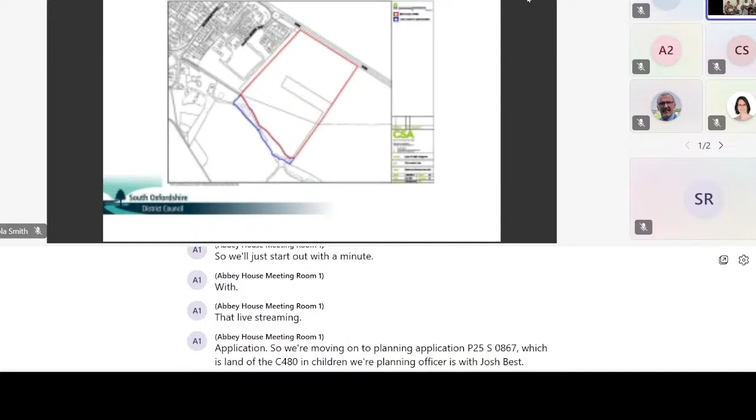So we're moving on to planning application P25S0867, which is land off the B480 in Chalgrove. The planning officer is Nicola Smith. Thank you, Chair. This is an outline application for up to 160 dwellings, far eastern end of Chalgrove. This site has been subject to 2 previous applications in recent years, and I'll discuss the detail of the planning history shortly. The application is substantially the same as the previous submission.

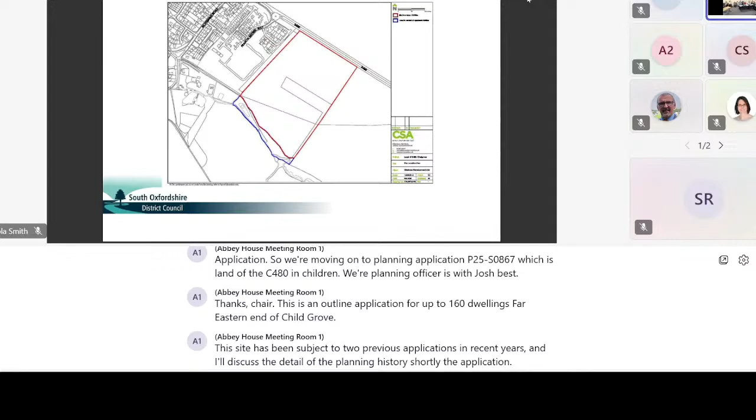However, the site. I'm so sorry to interrupt, but we can hear a loud volume next door. I'm just wondering whether we could just have that turned down. Thank you, Matthew.

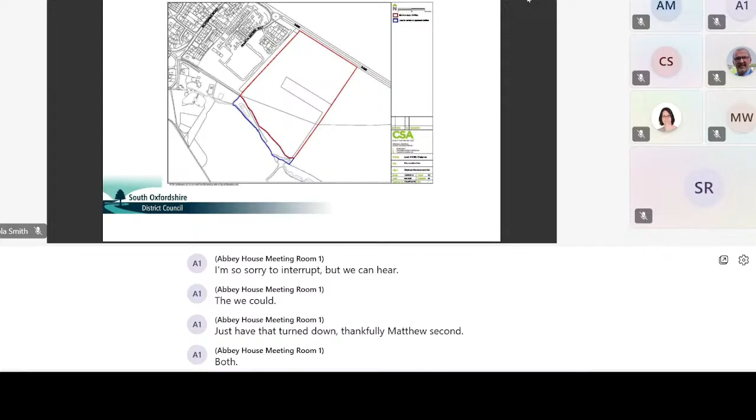The application is substantially the same as the previous submission. However, the site in this case has been reduced slightly to take the developable area outside of the revised flood zones to Chalgrove Brook at the south, which is indicated by the blue section on the plan.

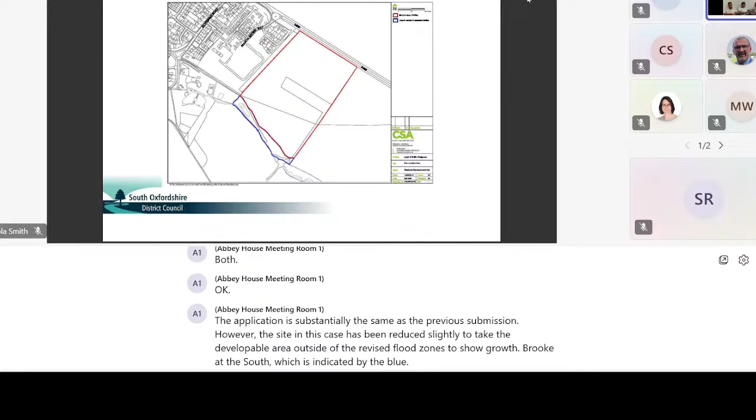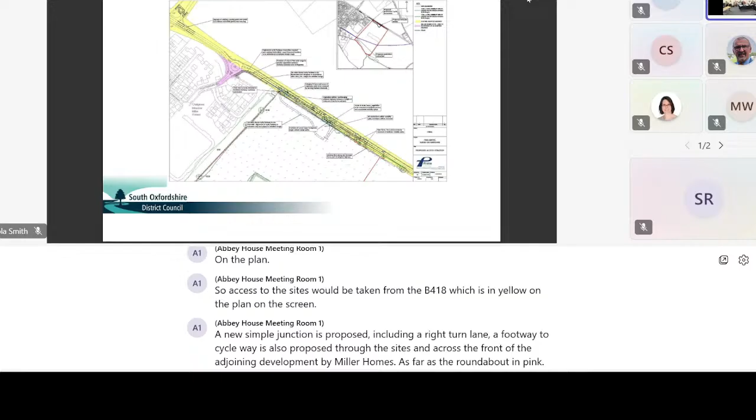So access to the site would be taken from the B480, which is in yellow on the plan on screen. A new simple junction is proposed, including a right turn lane. A footway cycleway is also proposed through the site and across the front of the adjoining development by Miller Homes, as far as the roundabout in pink, to enable access to the footpath cycleway network towards the village.

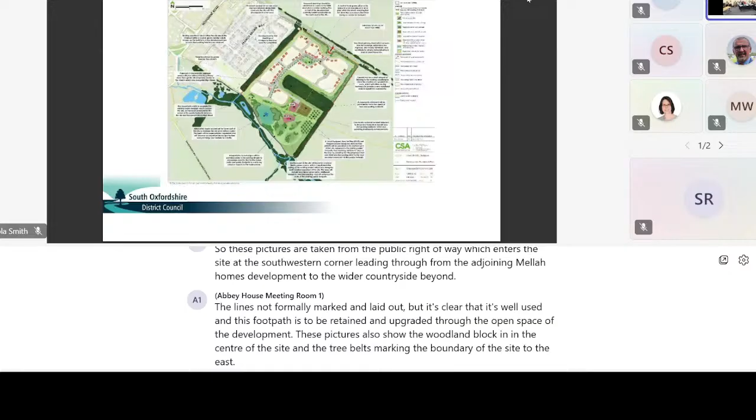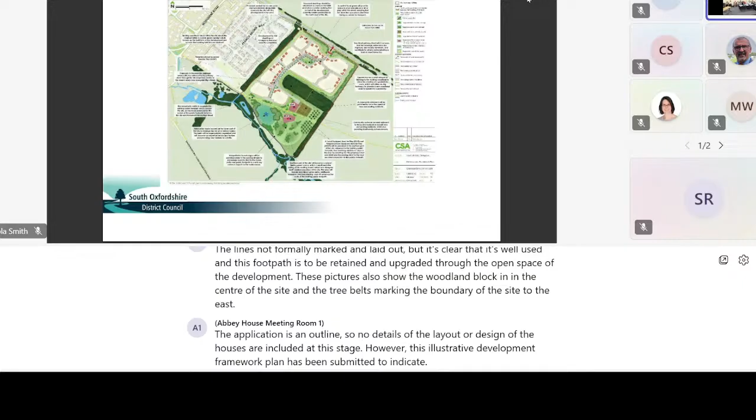The application is in outline, so no details of the layout or design of the houses are included at this stage. However, this illustrative development framework plan has been submitted to indicate how the development could be accommodated on the site, whilst retaining important features such as the woodland block that you can see in dark green in the centre, and the public right-of-way, which is denoted by the yellow dashed line through the site, kind of from the corner of the other development sites to the west, leading out to the open countryside.

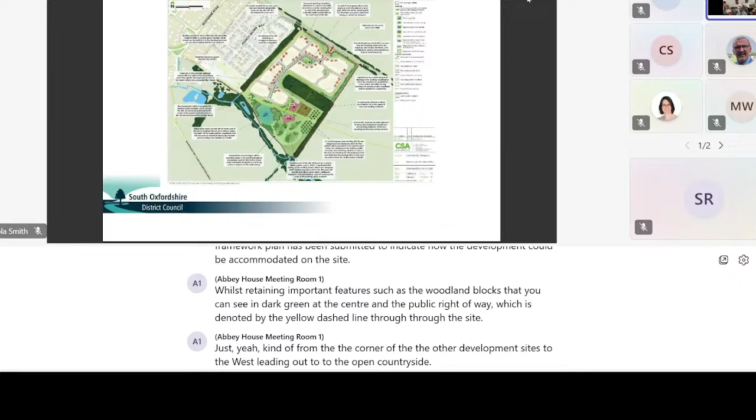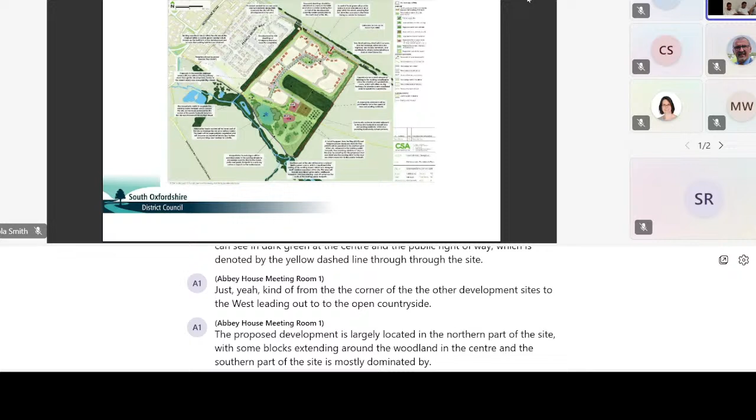The proposed development is largely located in the northern part of the site, with some blocks extending around the woodland in the centre. And the southern part of the site is mostly dominated by open space, with 2 play areas, allotments, an orchard, a large drainage basin, together with natural green space. These proposals have changed very little from the previous applications.

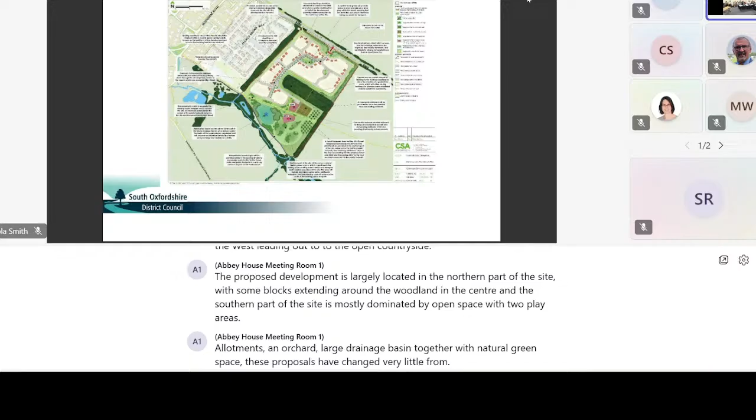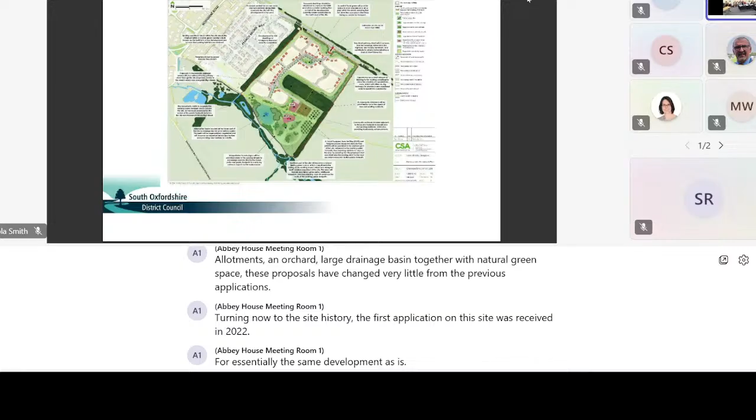Turning now to the site history. The first application on this site was received in 2022 for essentially the same development as is currently proposed. The application was refused under powers delegated to officers for 5 reasons, and these are summarised as: number 1, the development is contrary to the development plan; 2, there would be unacceptable landscape harm; 3, no archaeology information was submitted; and 4 and 5 related to the absence of a legal agreement to secure the infrastructure and affordable housing required. This refusal was appealed, and the appeal was dismissed in early 2023.

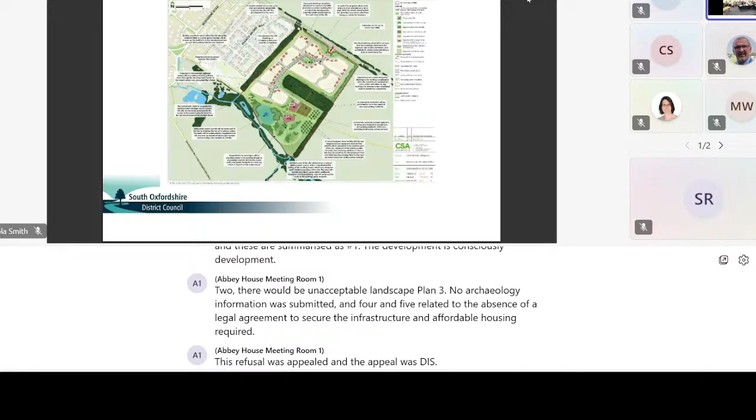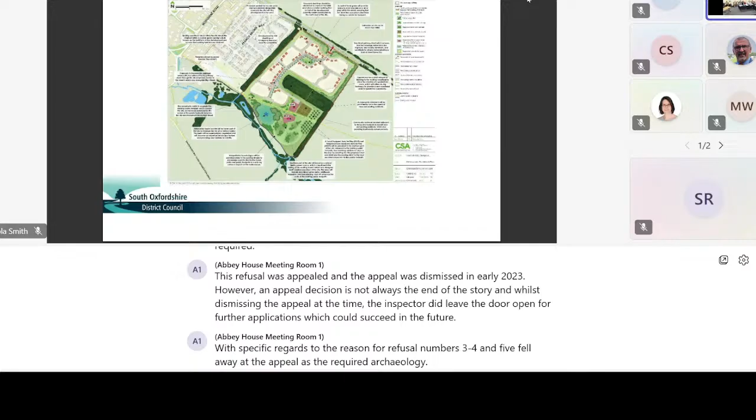However, an appeal decision is not always the end of the story, and whilst dismissing the appeal at the time, the inspector did leave the door open for further applications which could succeed in the future. With specific regard to the reasons for refusal, numbers 3, 4 and 5 fell away at the appeal as the required archaeology information was submitted and a legal agreement was agreed with the council to secure the infrastructure. Reason 3 would not apply to this application, as the archaeology information is up to date and to the satisfaction of the county archaeologist, and conditions are recommended to ensure proper archaeological investigation is carried out.

Reasons 4 and 5 were overcome at the appeal by the signing of a legal agreement, which the applicants have advised they would be willing to do again. If the application is approved, work will begin on drawing up that agreement. If, however, the application were to be refused, the same reasons would also apply.

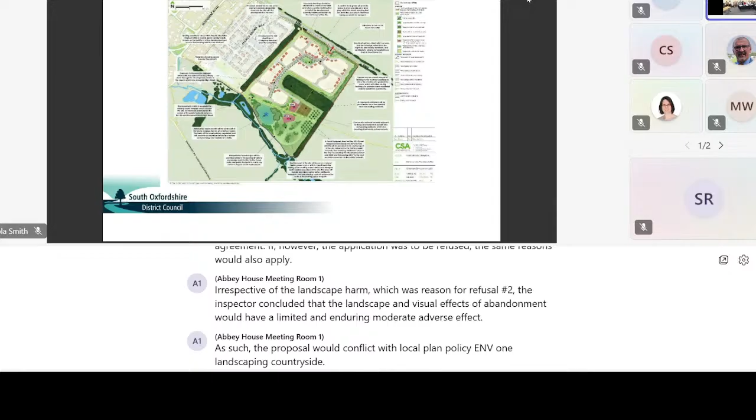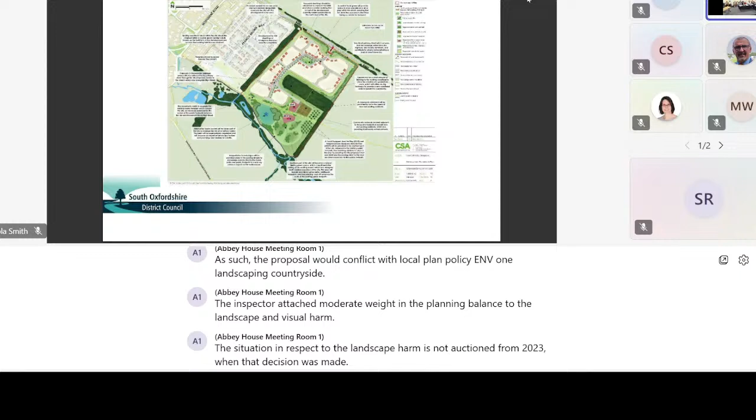In respect of the landscape harm, which was reason for refusal number 2, the inspector concluded that the landscape and visual effects of the development would have a limited and enduring moderate adverse effect. As such, the proposal would conflict with local plan policy ENV1, landscape and countryside. The inspector attached moderate weight in the planning balance to the landscape and visual harm. The situation in respect to the landscape harm has not altered from 2023, when that decision was made. Some harm to the landscape will arise from the development, and I have given this moderate weight in the planning balance as per the appeal decision.

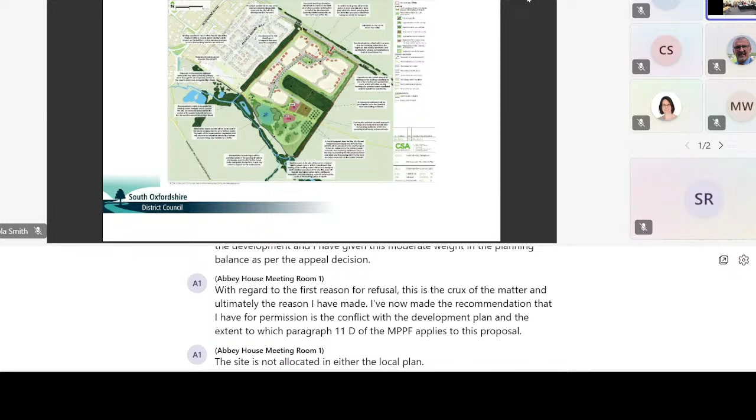With regard to the first reason for refusal, this is the crux of the matter, and ultimately the reason I've now made the recommendation that I have for permission: the conflict with the development plan and the extent to which paragraph 11D of the NPPF applies to this proposal. The site is not allocated in either the local plan or the neighbourhood plan and lies outside the built-up area of Chalgrove. The development remains in conflict with the spatial strategy for the district.

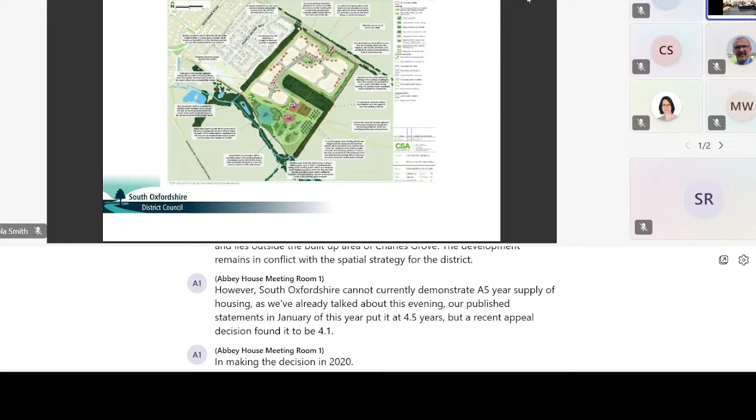However, South Oxfordshire cannot currently demonstrate a 5-year supply of housing, as we've already talked about this evening. Our published statement in January of this year put it at 4.5 years, but a recent appeal decision found it to be 4.1. In making the decision in 2022, the inspector for this site noted that the council were unable to demonstrate a 5-year supply of housing at that time either.

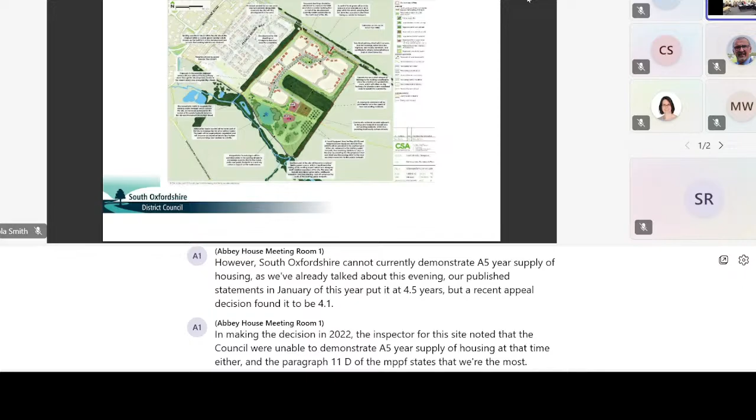And paragraph 11D of the NPPF states that where the most important policies for determining a proposal are out of date, i.e. there's no 5-year land supply, permission should be granted unless any adverse impacts of doing so would significantly and demonstrably outweigh the benefits when assessed against policies of the framework read as a whole. And this is commonly known as the tilted balance.

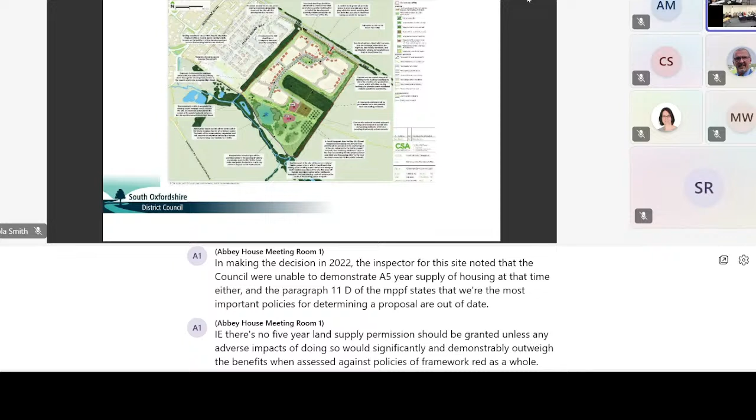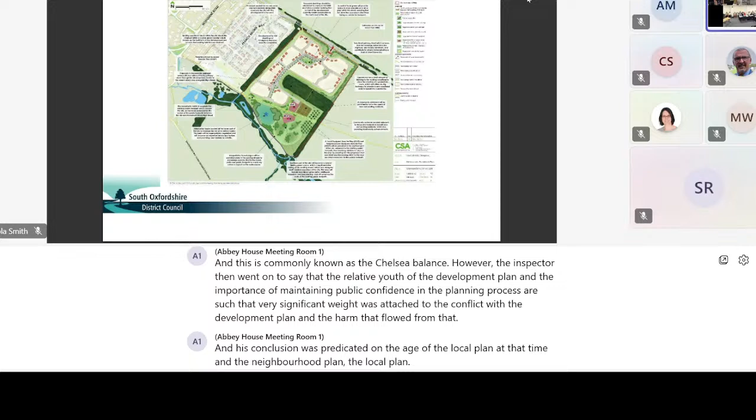However, the inspector then went on to say that the relative youth of the development plan and the importance of maintaining public confidence in the planning process are such that very significant weight was attached to the conflict with the development plan and the harm that flowed from that. And his conclusion was predicated on the age of the local plan at that time and the neighbourhood plan. The local plan, as you know, was adopted in 2020 and was less than 3 years old at the time of the decision. It is now 4.5 years old and due to be replaced by the joint local plan within the year, is the programme. The Chalgrove neighbourhood plan was made in 2018 and is now 7 years old.

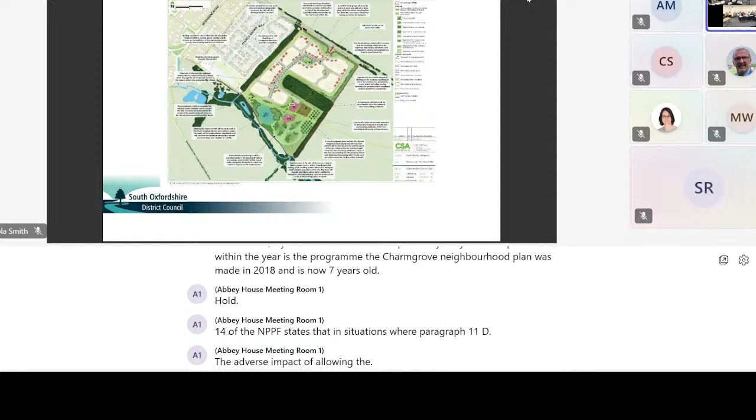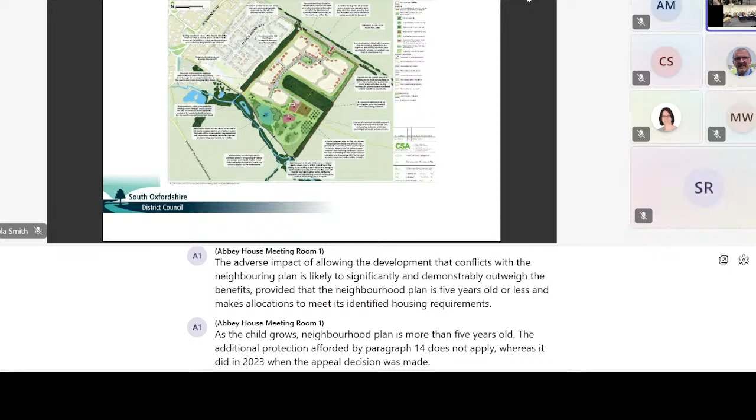Paragraph 14 of the NPPF states that in situations where paragraph 11D applies, the adverse impact of allowing the development that conflicts with the neighbourhood plan is likely to significantly and demonstrably outweigh the benefits, provided that the neighbourhood plan is 5 years old or less and makes allocations to meet its identified housing requirements. As the Chalgrove neighbourhood plan is more than 5 years old, the additional protection afforded by paragraph 14 does not apply, whereas it did in 2023 when the appeal decision was made. Officers consider that we are no longer in a situation where the relative youth of the plan can be claimed and the tilted balance must be applied to this scheme.

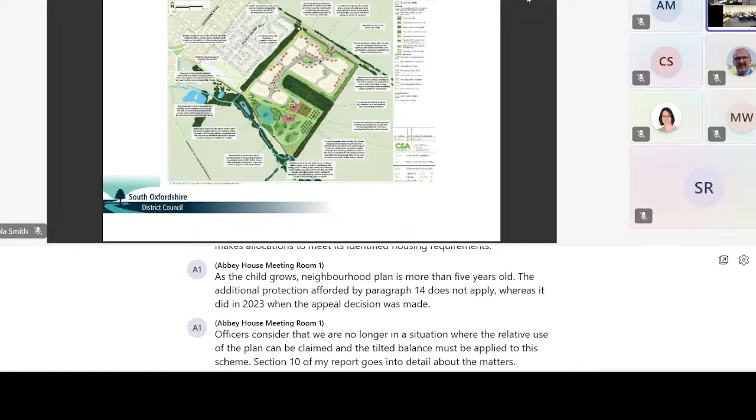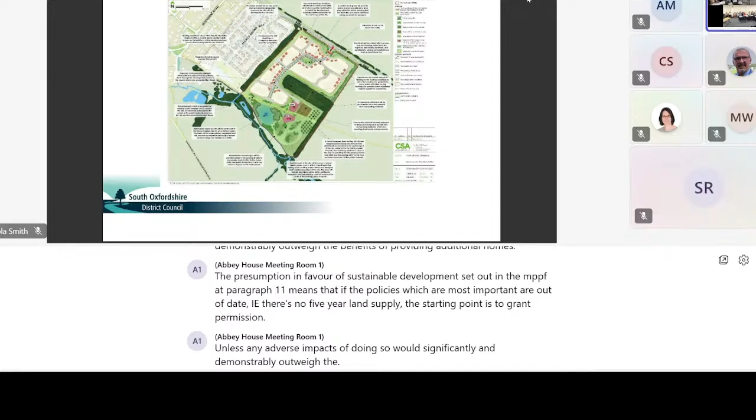Section 10 of my report goes into detail about the matters that weigh for and against the proposal, concluding that whilst there are impacts of the proposal which weigh against it, notably landscape impact, conflict with the development plan, lack of school places and connectivity, taken together, they do not significantly and demonstrably outweigh the benefits of providing additional homes. The presumption in favour of sustainable development set out in the NPPF at paragraph 11 means that if the policies which are most important are out of date, i.e. there's no 5-year land supply, the starting point is to grant permission unless any adverse impacts of doing so would significantly and demonstrably outweigh the benefits. The application is therefore recommended for permission, subject to the conditions set out in my report and a legal agreement.

Okay, thank you, Nicola. Right, we have a number of speakers on this. First speaker is Councillor Jan Russell from Chalgrove Parish Council.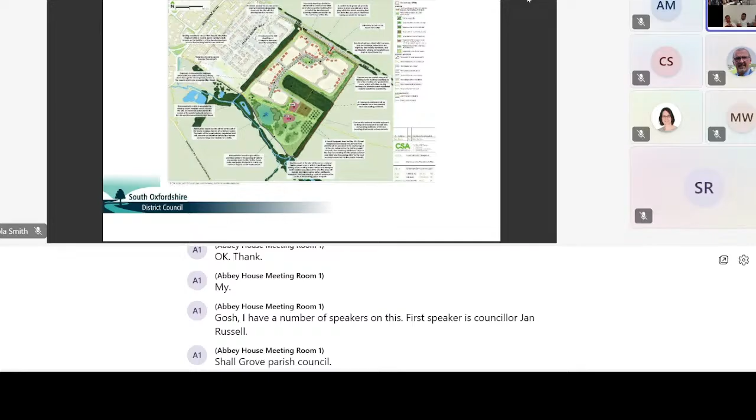You'll have 5 minutes starting from when you... Yeah, I was actually told I had 3 minutes, so... I don't know. That's the second one that said that. We've never had 3 minutes. That's what we were told. Why, who? It came through our clerk, so I'm not sure. From your clerk at Chalgrove? Yeah. No, she's wrong. Wasn't she asked by somebody? Someone called Anne told her, SODC clerk. Anyway, that's fine. Well, we'll take that up because it's never been the case in this council.

Angela Rayner said build, build, build, but she also added on to her statement the right houses in the right places. Chalgrove Parish Council is totally opposed to this application, as we have been all the way through. Chalgrove Primary School has a capacity in its academy funding agreement of 210 places. As of yesterday, they have 224 pupils, including nursery, on their roll.

Figures in the officers' report are out of date. The Meadowbrook development, still under construction, means many children will need school places for years to come. There's been talk of Chalgrove expanding. Firstly, it's not possible, they don't have land. Secondly, they are a trust, so OCC have no control over them.

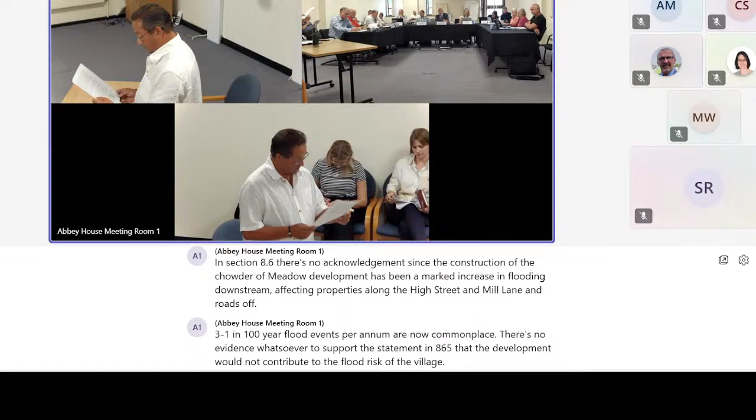In section 8.6, there's no acknowledgement that since the construction of the Chalgrove Meadow development, there's been a marked increase in flooding downstream, affecting properties along the High Street and Mill Lane and roads off. Three 1-in-100-year flood events per annum are now commonplace. There's no evidence whatsoever to support the statement in 8.65 that the development would not contribute to the flood risk of the village. There's ample evidence that upstream development has increased the number of times that Chalgrove floods. The NPPF clearly states that development should not increase the flood risk elsewhere.

It's also important to note that the river in question is a chalk stream, and only yesterday the government committed to increase protection of chalk streams, stating that from June 2025, the Environment Agency's updated Water Resource National Framework will place chalk stream environmental needs at the heart of all water resource planning and decision making. The primary reason this is being recommended for approval is the lack of a 5-year housing land supply. All other factors strongly argue against this application.

Chalgrove has done everything asked of it, and now we're being told we have to condemn future residents to an isolated area, unconnected to the village, with very limited employment options, very limited retail options, nowhere for their children to be educated, and with an inadequate public transport service that will leave them no option but to travel by car on narrow and potholed country lanes. The JLP 2041 has deallocated Chalgrove Airfield as a strategic location, so the panacea proposed by the applicant to resolve these issues will not materialise.

This application is almost identical to the one that was refused in 2022, rejected at appeal in 2023, and declined to be determined in 2023. Chalgrove stood shoulder to shoulder with SODC at the appeal hearing, and we won. We're prepared to do the same again.

If you will work with us and not against us, we'll provide the expert local knowledge and highlight the misinformation and outright lies the applicant will tell, but we can only do that if SODC supports our contention that this is not a sustainable development and should be rejected.

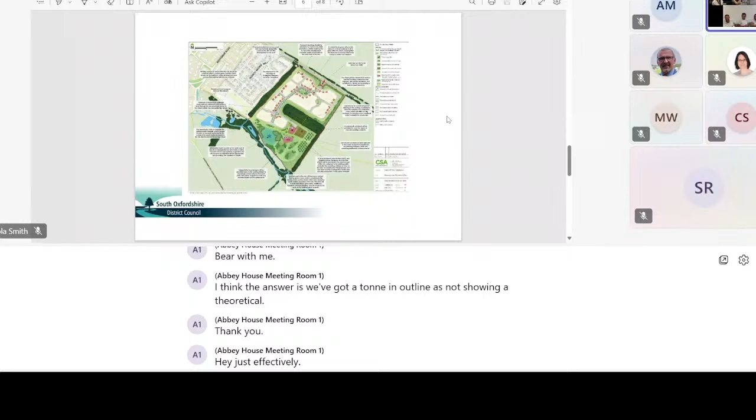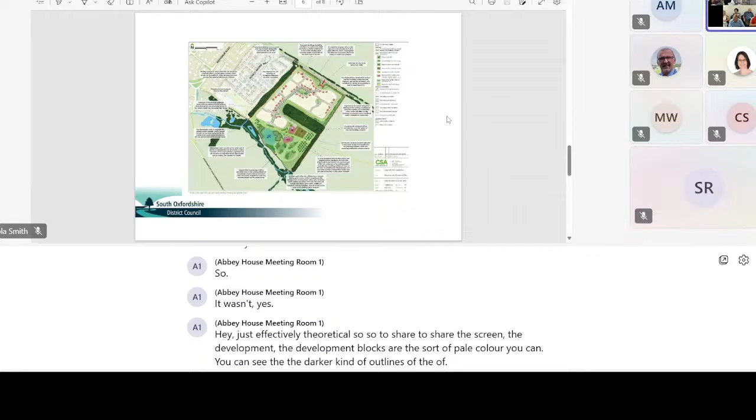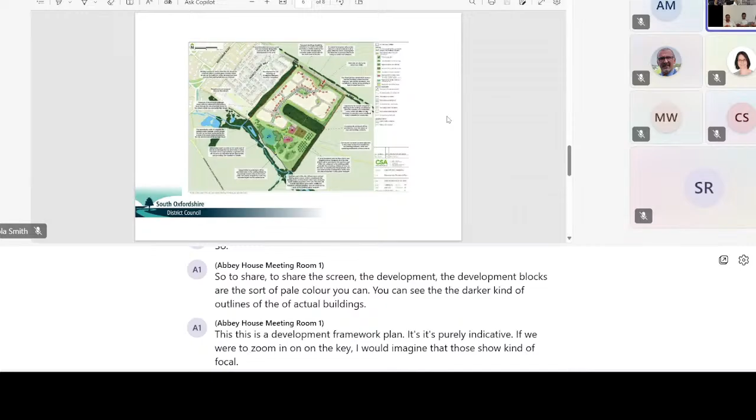So to share the screen, the development blocks are the sort of pale colour. You can see the darker outlines of actual buildings shown. This is a development framework plan. It's purely indicative. If we were to zoom in on the key, I would imagine that those show focal buildings and key frontages that are being identified on the plan. Thanks Councillor Arlett. Yeah, it's the paler blocks of development that are proposed to be housing. But it is very deceptive, isn't it?

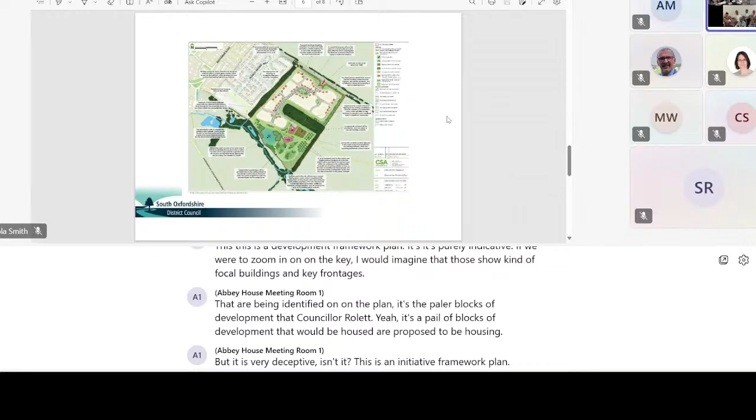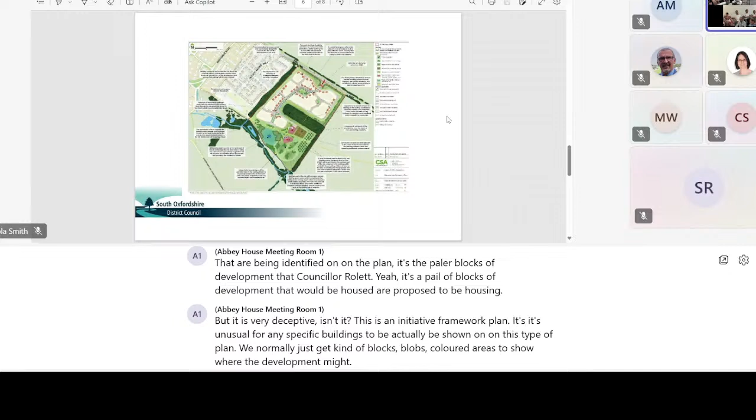This is an illustrative framework plan. It's unusual for any specific buildings to actually be shown on this type of plan. We normally just get blocks, blobs, coloured areas to show where the development might take place. Thank you. And this all comes down to the tilted balance, which Councillor Heathrow has already asked about. Is it true to say that the tilted balance is a subjective process? Or has a subjective element? Yes, it has a subjective element.

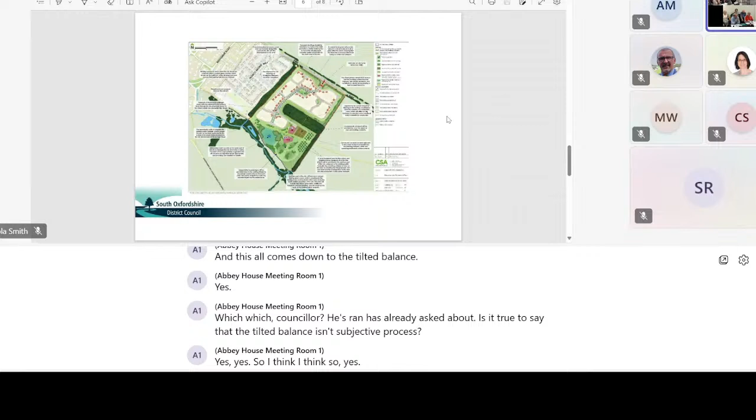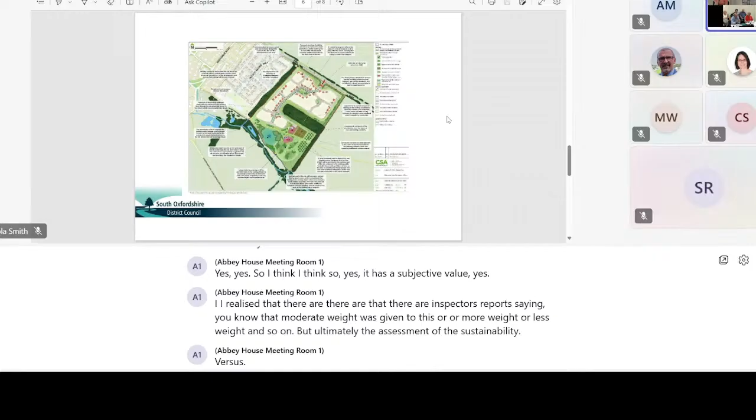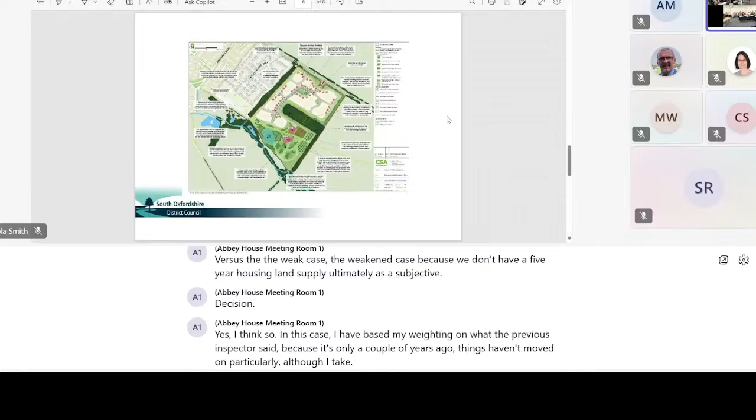I realise that there are inspectors' reports saying that moderate weight was given to this, or more weight, or less weight, and so on. But ultimately, the assessment of the sustainability versus the weakened case, because we don't have a 5-year housing land supply, ultimately is a subjective decision. Yes, I think so. In this case, I have based my weighting on what the previous inspector said, because it's only a couple of years ago. Things haven't moved on particularly, although I take the point about school places has moved on. That's an evolving situation. So I am basing it on what the inspector found on the previous appeal. Thank you.

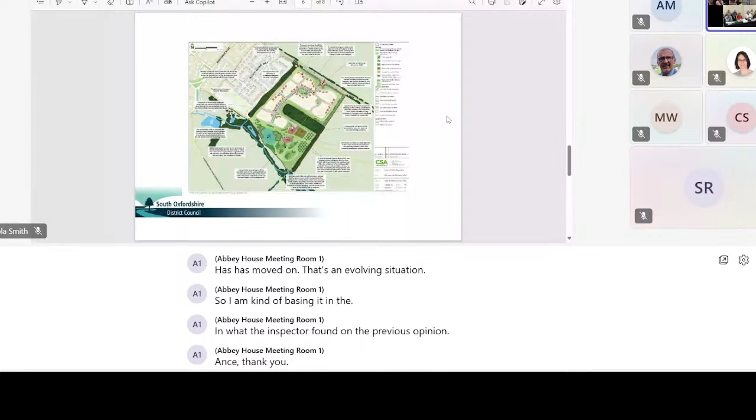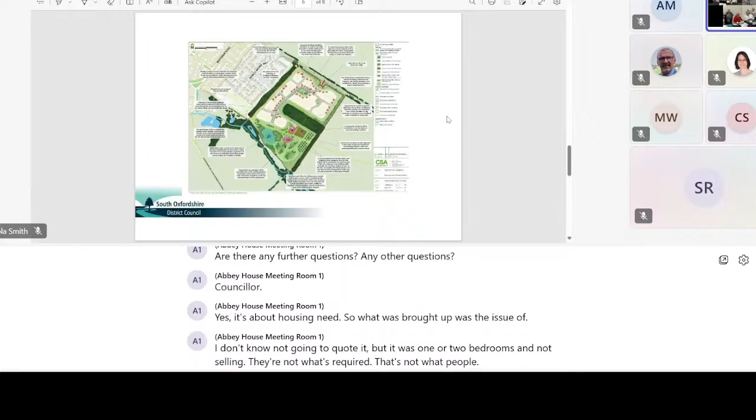Are there any further questions? Do you have another question, Councillor? Yes, it's about housing need. What was brought up was the issue that 1 and 2 bedrooms are not selling. They're not what's required. That's not what people are after. And quite often, if people are being moved into social housing that don't come from the area, it's not local need at all. So how do you respond to that? Okay, so

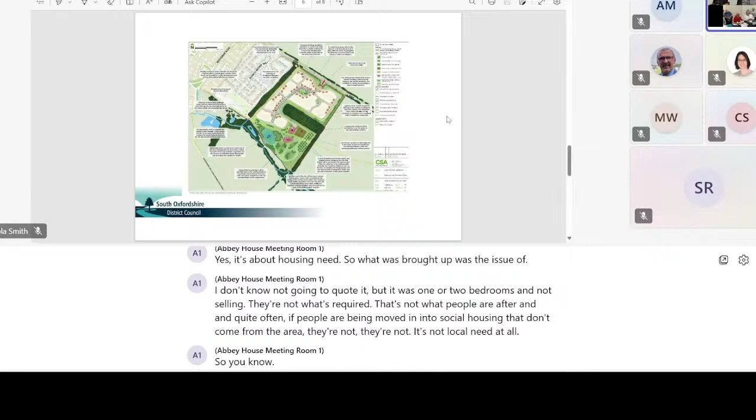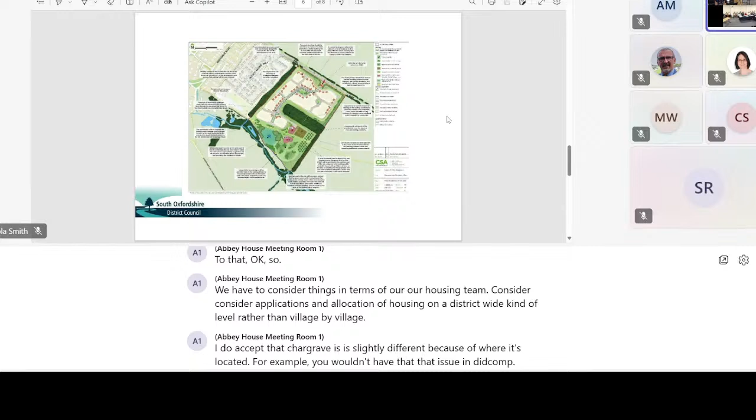our housing team consider applications and allocation of housing on a district-wide level rather than village by village. I do accept that Chalgrove is slightly different because of where it's located. For example, you wouldn't have that issue in Didcot, say. I'm aware that Meadowbrook, the housing site that was quoted, have had problems selling. They have come to us to ask that more affordable housing is put on the site rather than market housing. Some of that we've agreed to. So there is more social housing now on that site than was originally granted.

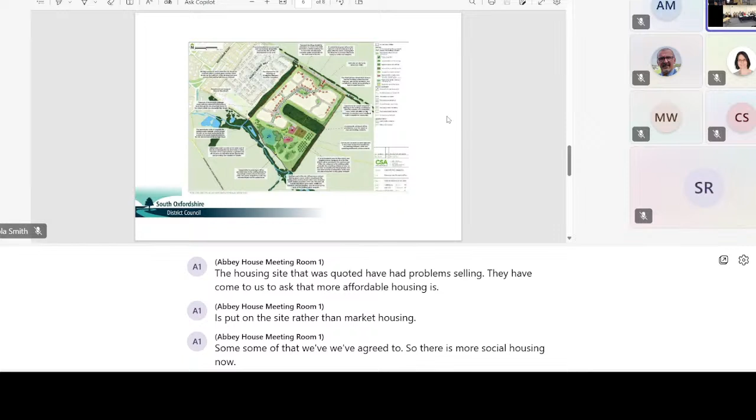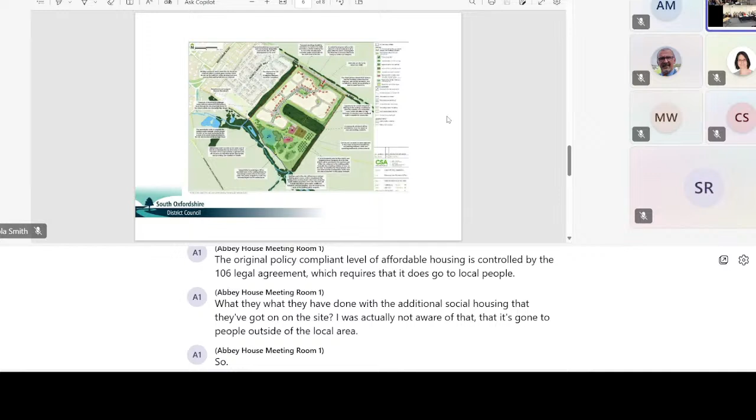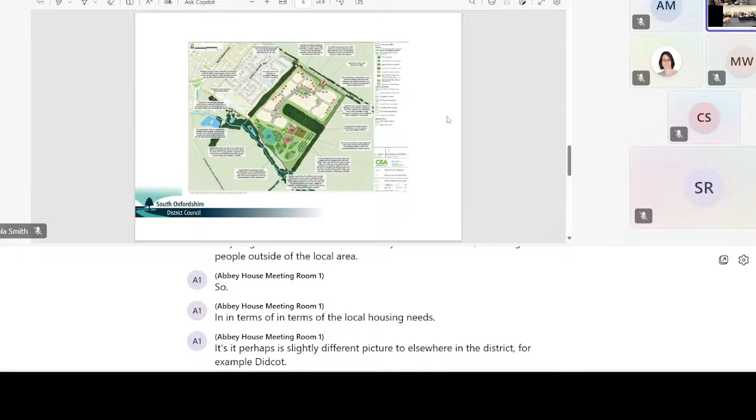The original policy compliant level of affordable housing is controlled by the 106 legal agreement, which requires that it does go to local people. With the additional social housing on the site, I was actually not aware that it's gone to people outside of the local area. So in terms of the local housing need, it perhaps is a slightly different picture to elsewhere in the district, for example Didcot, but we look at things on a district-wide level; our housing land supply is a district calculated figure rather than a local calculated figure.

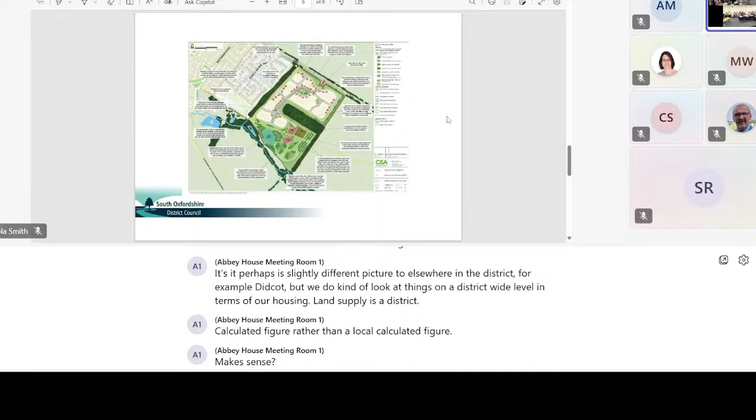That makes sense. Right, sorry. Don't want to get too bogged down. Yeah, really. The audience have asked if you could stop sharing so they can see what's going on. Sorry.

Right. Have we any questions to the planning officer? We now need to move into a proposal and some debate. Looking for a proposal. Councillor Norman.

I propose that we go against the officer's recommendation and refuse the application. Do I speak now? I need to know your reasons really, and then we'll go see who's a seconder. Okay. This has been turned down once at planning, and secondly at appeal. At least a previous application was turned down at appeal. This is a very similar application.

The only reason this has come back is because the developer thinks there's a chance that the goalposts have shifted just enough to get this in. This is a highly unsustainable site. I agreed, unusually, with every single word that the objectors raised. I don't need to reiterate those because they put them extremely well. It's wrong on every level in terms of the sustainability. If you allow this, really, you might just as well say, let's give up and just build anywhere at all.

I know that isn't a planning reason, but it would effectively mean the end of planning controls because in effect, the lack of a 5-year housing supply is trumping everything else. I note that we did not have a 5-year land supply when the inspector heard the last appeal. And I do realise that the goalposts have shifted slightly since then, but in my view, the tilted balance is not in favour of this. I think the reasons against are so strong that the argument that the lack of 5-year land supply, which is not a definitive rule, it is an indicative rule, does not overrule the reasons for refusing this application.

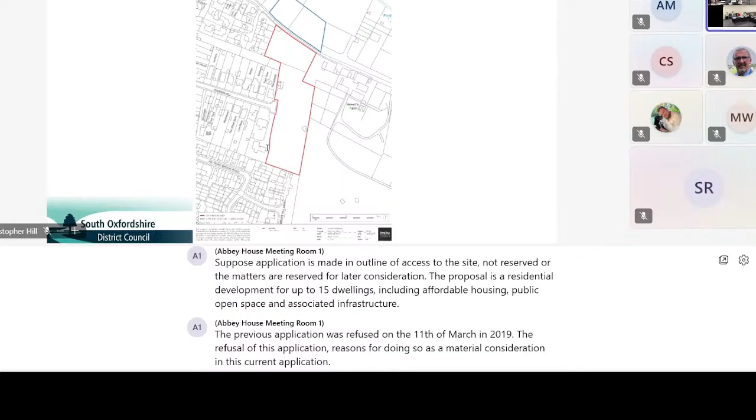The proposed application is made in outline with access to the site not reserved; other matters are reserved for later consideration. The proposal is a residential development for up to 15 dwellings, including affordable housing, public open space, and associated infrastructure. The previous application was refused on the 11th of March in 2019. The refusal of this application and reasons for doing so is a material consideration in this current application. It was refused for 5 reasons, which I have summarised: an excessive number of dwellings in relation to the size of Stadhampton, a lack of evidence or demonstration that the site could comfortably accommodate 30 dwellings, insufficient drainage evidence, and reasons 4 and 5 were due to a lack of a legal agreement.

This application was refused under delegated authority granted to officers and was not appealed. The application site itself is located on the eastern edge of the village of Stadhampton, between the village built-up area and New Wills Farm. The site covers an area of approximately 1 hectare.

The site edged blue, as shown on the location plan, does include a field north of the actual proposal of the application, but it is not proposed for development. It would singularly be used for the delivery of biodiversity net gain. The application site is not subject to any designations in terms of landscape conservation or species protection. The site is Grade 3 agricultural land. At present, Stadhampton does not have a neighbourhood plan, nor is one in an advanced or prepared state.

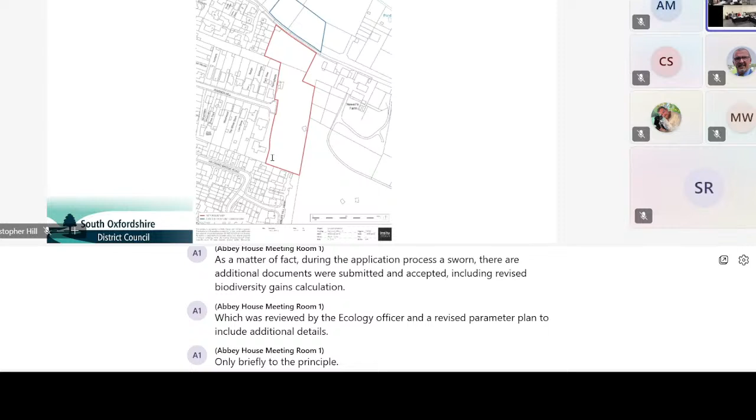As a matter of fact, during the application process, a small number of additional documents were submitted and accepted, including a revised biodiversity gains calculation, which was reviewed by the ecology officer, and a revised parameter plan to include additional details. Turning briefly to the principle of development, which I won't labour on the basis that we've covered a lot of matters concerning housing land supply in the previous application.

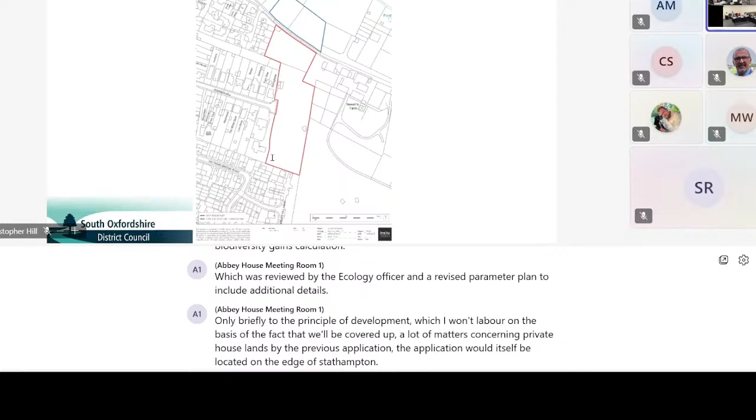The application would be located on the edge of Stadhampton, which is a smaller village under the settlement hierarchy. The application is not situated within either an allocated site or any other kind of allocation. Policy H8 of the local plan concerning housing in villages outlines that the council will support development within smaller villages in accordance with policy H16, which concerns backland and infill development. It is considered that whilst the application is modest and limited in nature, it is not strictly infill development, and this is material to the planning balance exercise.

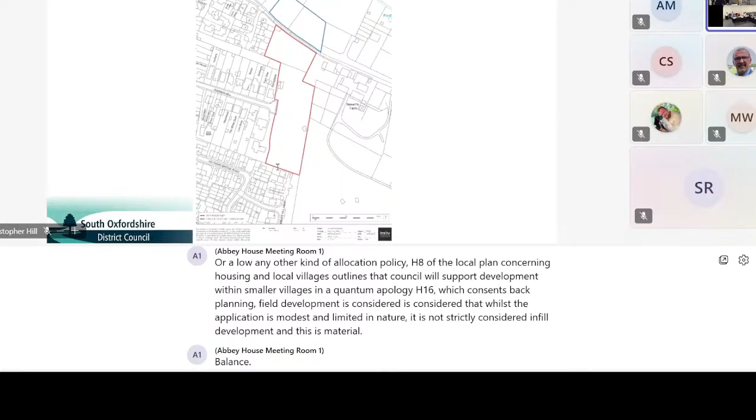We have, of course, extensively explored the housing land supply matter. Suffice to say, on the previous appeal decision, we are considering that we have 4.1 years of housing land supply. Therefore, permission for housing is to be granted unless the adverse impacts of doing so would significantly and demonstrably outweigh the benefits. I won't labour that one much further. I turn then to technical matters prior to returning to the planning balance exercise.

In terms of affordable housing, the proposed development would have 6 affordable homes with a tenure mix as advised by the council's housing team. It would also be delivered in accordance with accessible and adaptable homes. In terms of landscape, the application site is a medium-sized arable field of predominantly grassland.

Just realised I should be putting a couple of pictures up there.

The proposed development would marginally extend the current edge of Stadhampton. The landscape officer has assessed the landscape visual impact assessment that was submitted and has no objection. I'll switch over to this plan. It would expand into countryside, but would retain the eastern portion of the site as public open space intended to prevent coalescence with the rural structures to the east. The proposed development would be considered to have a localized impact on the landscape, the immediate vicinity of the site, and the immediate setting of various dwellings it would sit adjacent to.

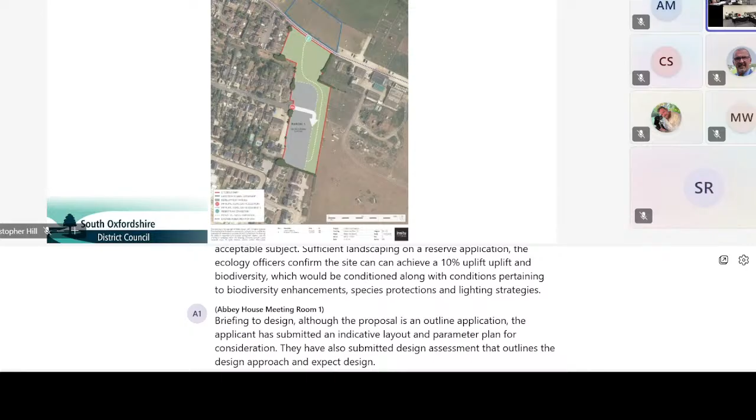Turning briefly to design, although the proposal is an outline application, the applicant has submitted an indicative layout and parameter plan for consideration. They have also submitted a design and access statement that outlines the design approach and expected design choices to be made. The application proposes 15 dwellings. The previously refused application was refused on the grounds that the proposed number of dwellings, being 30 at the time, would be excessive for the size of the site and the location and settlement of Stadhampton.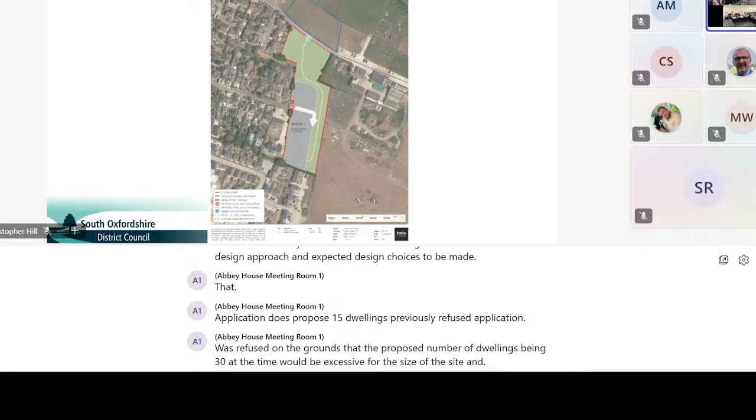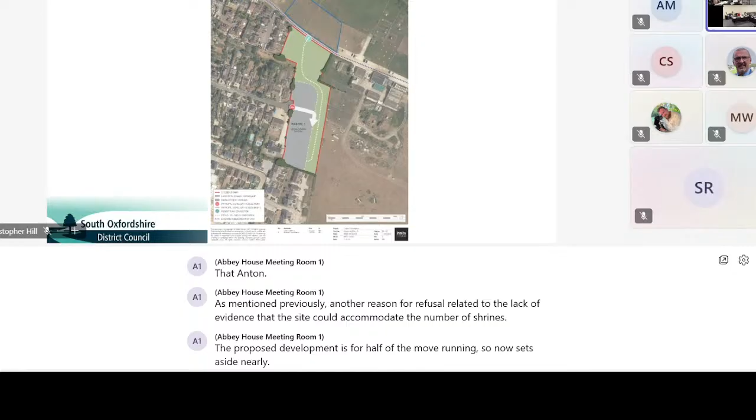As mentioned previously, another reason for refusal related to the lack of evidence that the site could accommodate the number of dwellings. The proposed development is for half the number of dwellings, and now sets aside nearly half of the site for public open space. From the submission as a whole, it is clear that the site can now accommodate 15 dwellings and will be of a comparable density to the residential developments it would join. Paragraph 7.43 of my report sets out the expectations in terms of design concerning a future reserved matters application.

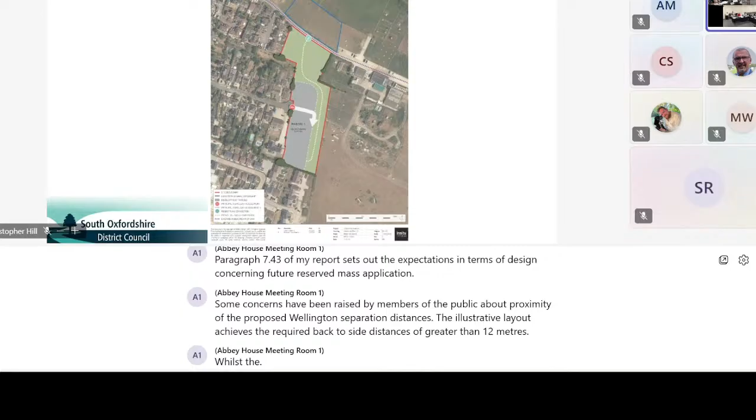Some concerns have been raised by members of the public about proximity of the proposed dwellings and separation distances. The illustrative layout achieves the required back-to-side distances of greater than 12 metres, whilst the back-to-back distances exceed 25 metres. This layout is not fixed, but it would be subject to further scrutiny at a reserved matters stage to ensure that the neighbourhood amenity is preserved.

Concerns about loss of view from residents are noted, and these comments are considered as part of the landscape impact earlier in the committee report. But specific loss of view from a resident is not a material planning matter.

Turning briefly to transport and access, combined vehicular and pedestrian access to the site would be taken from Warren Hill from the west. It is proposed that access will be achieved by removing the existing turning head and extending the carriageway and footway into the site. OCC Local Highways Authority have stated that the principle of access is acceptable and would just seek additional details via condition, including swept path and turning analysis for waste vehicles and such within the site.

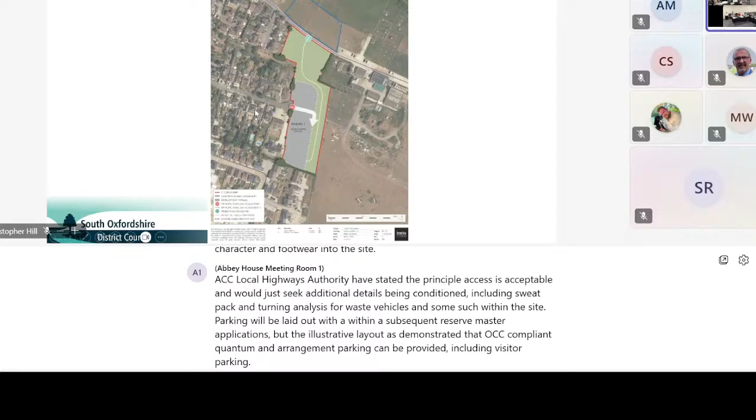Parking would be laid out within a subsequent reserved matters application, but the illustrative layout has demonstrated that OCC-compliant quantum and arrangement of parking can be provided, including visitor parking. I will just briefly switch to the pictures concerning the actual proposed access, and then a demonstration of where that access is to be extended from.

I'll go back to that one for a second. Oh, that's not gone the way it meant to. There we go.

The Local Highways Authority have noted that Stadhampton itself is not well served by public transport options and that facilities are somewhat limited within the village. Notably, the number 11 bus does serve the village and provides a functioning direct route to Oxford City. It is acknowledged that most residents would make use of a private vehicle for the purposes of healthcare, secondary and above education or larger shopping trips.

The trip generation has been assessed by the LHA and deemed acceptable in terms of daily trips and associated impacts. The LHA have also noted the pedestrian pathways and connections and have expressed that given previous appeals, notably on the ones to the site to the south, they would consider them acceptable, including on matters of sustainable development. Contributions to the public bus service would be sought and secured by a Section 106 agreement.

Briefly touching on final matters, in terms of drainage, the OCC Lead Local Flood Authority, the Drainage Officer and Thames Water have not objected to the proposed infiltration and SuDS features to be utilised on site, and these will be conditioned. On other matters, contributions to be secured are outlined within the committee reports.

Archaeology as well as environmental matters, including contamination, air and waste, have been deemed acceptable, including construction management plans to protect the amenity of future residents and neighbouring residents. Owing to the modest scale of the proposal, OCC are not seeking education contributions for the proposed development and have also not objected.

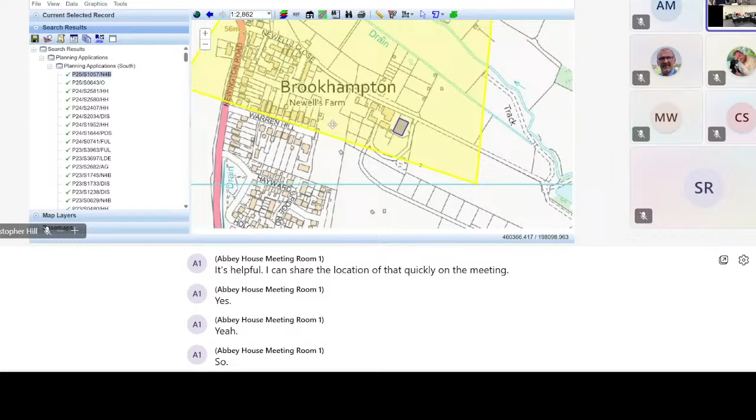Right. Got it, I think. Yeah, so that's conversion of buildings on Newell's Farm, which is to the east. So it wouldn't be the only parcel of land that's within the blue. It's helpful. I can share the location of that quickly on the meeting. For the avoidance of doubt, if we could just get that. So the application site, just to zoom out briefly, is this green strip of land. And the application we're referring to here is a building over here, conversion of 4 dwellings. Sorry, Chris, could you just do the application site again quite slowly? Yeah, of course. I'll zoom out a touch here.

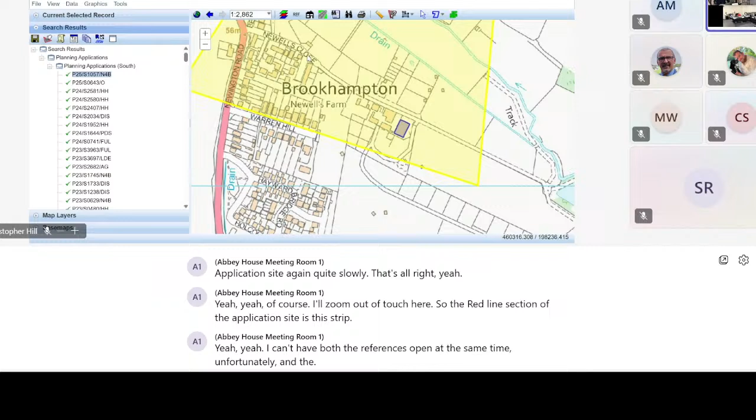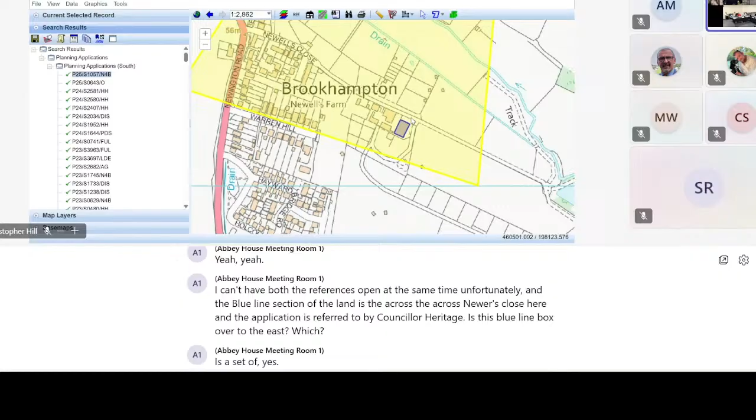So the red line section of the application site is this strip. Keep going. I can't have both the references open at the same time, unfortunately. That's fine. And the blue line section of the land is across Newell's Close here. And the application that's referred to by Councillor Heritage is this blue line box over to the east, which is separate. Yes, I think it's a separate issue, isn't it? It would obviously not impede biodiversity net gain delivery. I think it's just one of the things you need to come out of your report, really.

Sorry, what was the relevance of the land to the north of the road? It's within the applicant's control. It was also part of the application that was refused in 2019. It remains within the blue line. It cannot be developed on as part of this application, but it could be used for the delivery of biodiversity net gain through additional planting, etc. And could it be subsequently developed? It would not as part of this application, but that's open to a separate further application.

Okay, sorry, Councillor. I didn't know whether Councillor Sadler had finished. I think you can only ask one question, so go ahead. Could you just go through the reasons? So this area was subject to a previous planning application, but not an appeal. Is that correct? That's correct. Okay. And did that planning application come to committee? No, it was refused on delegated authority. Okay. Could you just reiterate the reasons for refusal quite carefully? You went very rapidly. Understandable. I was just mindful of time. I think the first two reasons for refusal are pertaining to the location, size, etc. So would it be helpful if I just read those out in full briefly? Yes, thank you.

So reason for refusal number one was the proposed development would result in significantly larger scale development than that deemed appropriate for a smaller and less sustainable village with limited services and facilities. It would not comprise infill development. Instead, it would result in the considerable expansion of the village into the open countryside. As such, the proposal would not accord with the district's strategy for growth and necessary infrastructure, contrary to, and I won't read out the policy.